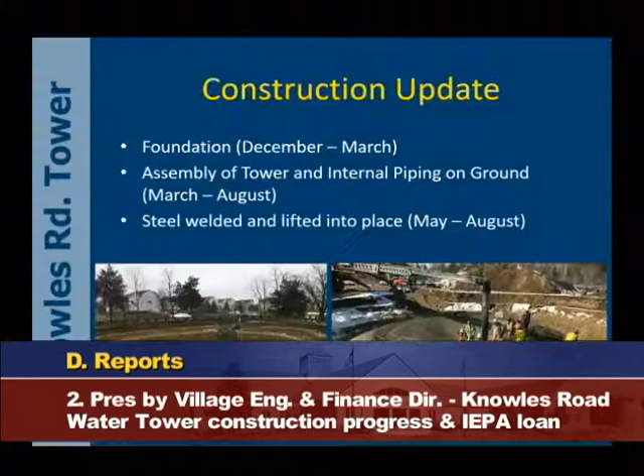Good evening, Mayor, trustees. Thank you for the opportunity to speak to you today about the Knowles Road Water Tower and our IEPA loan update. I'll go over the construction update and what's to come with respect to the project, and Brian will go over the financials at the end.

For construction, the two photographs here at the bottom show the construction of the foundation of the water tower, which you can no longer see since it's been buried. That was done in the winter months. It took about 50 concrete trucks and about 490 cubic yards of concrete, which gives you a scale of how large that was.

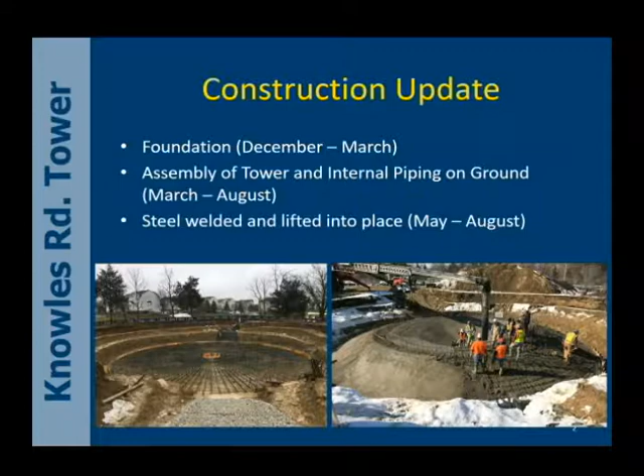Then in the March through August timeframe, they assembled the water tower and the internal piping at the ground level and underground that takes water from the main into the tower. The steel has been welded over the last several months, as I'm sure you've seen as it proceeds up.

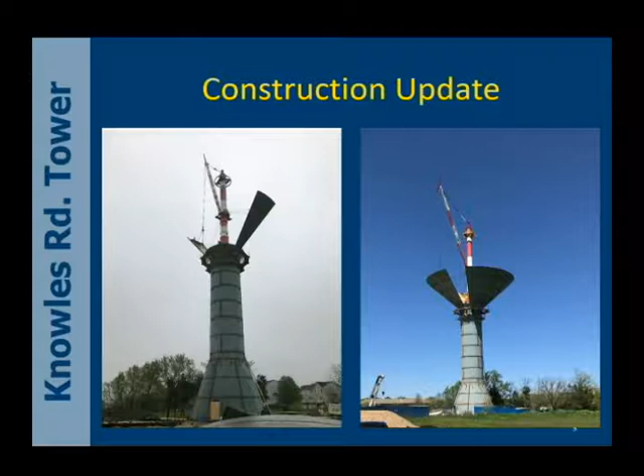Here's how it gets constructed. They use welding at the ground level, and then the panels get lifted up into place. So here's the beginning and mid of the bottom section, then they do the midsection, and finally the top. That's the progress we went through.

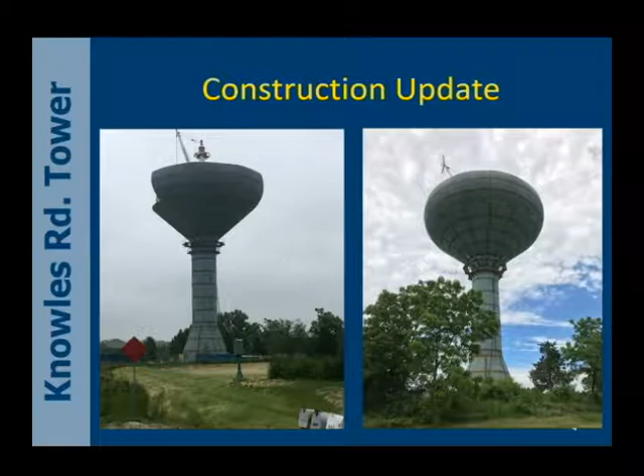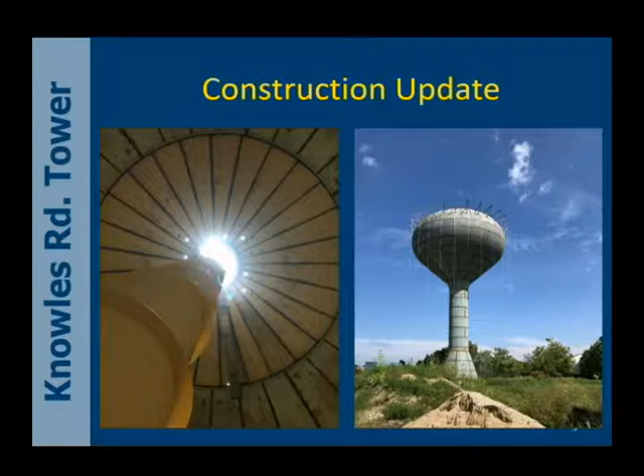It only goes up when they're working and comes back down at the end of the day. It's supposed to contain debris and stop it from sticking to the paint as they're applying it. There will be 3 coats on both the inside and outside to maintain structural integrity.

So what's going to happen next? Right now we're at about 82% complete, and the painting of the interior and exterior is going on right now. It's a 12-week process - we're probably in about week 1 or 2, so it'll take us to the end of November, at which point they'll install all the equipment inside the base of the tower.

That's for controls, SCADA, motor control centers, all those things. They'll fill the tower with water, chlorinate it, test it, and then set the parameters at which the water tower will fill and disperse back into the water system. At that point, we'll be at substantial completion, which is important for what Brian will talk about later.

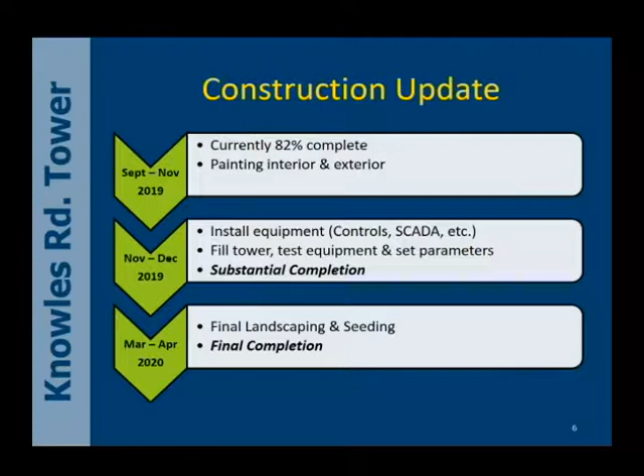Then they'll shut down for the winter and come back in the spring to do the landscaping. So they should be pretty much complete by the end of the year.

I wanted to take a second to review the loan and the direction staff had last time we talked about it and approved the loan. The total approved IEPA loan was $6,132,208. Against that, we have about $5.97 million in contracts, so there's a little bit of contingency built in. The loan term is 20 years at 1.84%, fixed.

We have about $1.76 million remaining to be paid out on the contracts that are tied against the loan. As Heather mentioned, the first payment is 6 months after the substantial completion date, which we're targeting for the end of December, so our first payment on the loan will be in fiscal year 2021.

Just a note on the next bullet point: the cash balance in the water fund at the end of last fiscal year was $6.35 million.

As we talked about when we approved the loan documents, we discussed using $1.5 million from reserves to lower the amount we borrowed, plus an additional $200,000 annually towards debt service, which brought us to the 10-year term we had talked about then. So really just making sure that's still the direction the board wants to go. It gives us a little more budget flexibility by paying some up front and frees up money in the water fund.

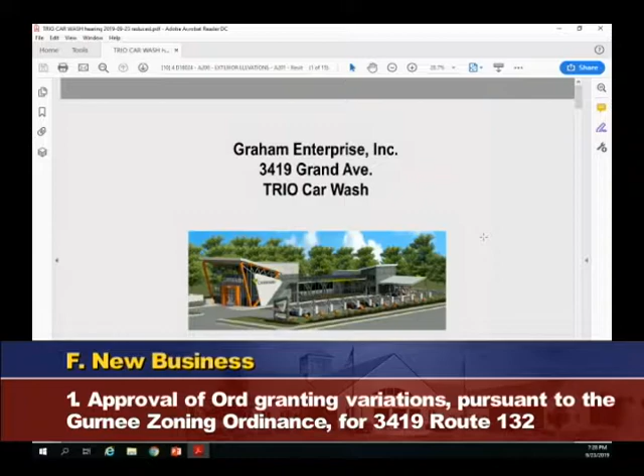As you know, they were before the Planning and Zoning Board earlier this year with a proposal to redevelop the site for a car wash. It received mixed reviews. Before it came to the village board, they redid the plans. The village board remanded it back to the Planning and Zoning Board, where it was heard again. Made it through that process. There's been a lot of changes along the way.

The memo from our associate planner, Clara, was very detailed, but as I said, it's a pretty complex proposal just because of the moving back and forth between the planning and zoning board and village board. David lived through it, was at all the PZB meetings, and is going to walk us through where we're at, kind of where it was, and where we've gotten to today, and what exactly the village board is considering this evening. Okay, thank you, Patrick.

I will do my best to give you a clear, straightforward synopsis of the process to date. It first appeared at the Planning and Zoning Board. They had several requests for variances, special use permits, and a couple of minor sign exceptions on the list. A few were approved or recommended for approval, a couple were recommended for denial, and one tied 2-2 vote that ended up being no recommendation.

Once they completed the planning and zoning process, they went back and retooled the plans a little bit and were able to resolve some of the issues that the Planning and Zoning Board had with some of their negative recommendations. Based upon the scope and quantity of those, staff felt it appropriate, and the village board concurred, that it should go back to the Planning and Zoning Board for them to take a second look at it.

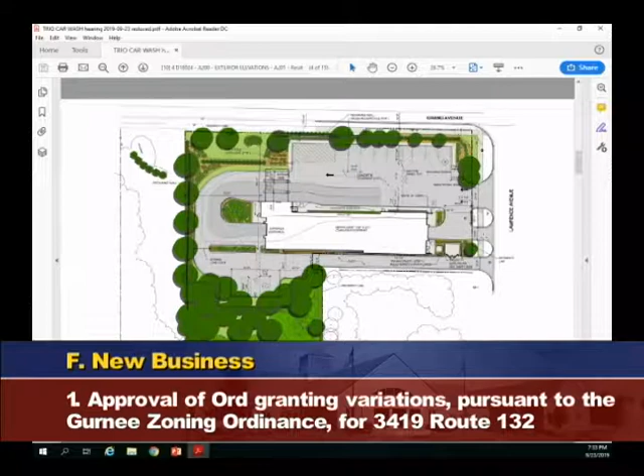Trustee O'Brien: Just for clarification on the design, back to the first one, would be fantastic if you can point to it. Just where is the grass versus asphalt section? This is the drawing to show the 3 pay stations were in this area. Those have been removed, and they've opted to keep the paved area and just hatch it off versus removing that and turning it to turf.

So it's creating green space on the front, and more permeable surfaces so water can get down instead of flooding. This is one of the comparisons made between the Hunt Club corridor and this corridor. We've always insisted on a lot of green space in the front to lessen the intensity, and so we've been trying to do that in this corridor too.

I understand. And one other, Mayor? Go ahead. The 2-2 tie had to do with the interior signs, and they mentioned, if I recall reading correctly, that there would be some trees that might block the view off of Grand Avenue. Or is that the 2 trees in the upper left-hand corner there?

Right, the signs in question are basically in this area, so it is going to be a somewhat obscured view into those signs. Planning and zoning board had mixed feelings on whether they were necessary, and they did exceed the requisite square footage and height of the signs within the site. So that's why it came to you as a 2-2 tie vote.

And I think those 3 signs were also to market some of the plans that they had, so it's primarily for the cars coming through the car wash that they could see advertisements. It's designed to market to cars already on the site, not marketing to cars off-site on Grand Avenue.

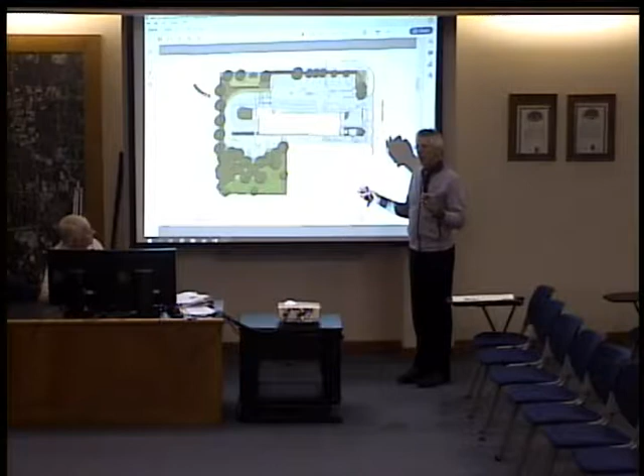Graham's have 19 car washes that they operate very well. I've designed over 350 car washes, so we're very aware of the maneuvering that's required. For this type of business, there are 2 things to make it successful: the person needs to be safe, and it needs to be convenient. It also needs to appear safe and very easy to turn, not tight turns. So all these radiuses have been run through a computer model to make sure that even the largest car, one as wide as a Humvee and as long as a Suburban, much larger than any car on the road right now, fits. That's how we determine the radiuses.

To enter the car wash, you're only entering from Lawrence Avenue, correct, this is the entry point, and it's one-way with arrows. Cars on Grand Avenue can enter Lawrence Avenue by making a right turn southbound or a left turn southbound. The current car wash right now actually has 3 curb cuts along Grand. So this whole process is really making this a more automated operation and a safer one.

When the wash is complete and you're exiting onto Lawrence Avenue, can you exit left or right, north or south? Yes, but quite frankly the majority of our customers are going to go back to Grand. Is it a mandatory left turn out of there? Not mandatory, because we like the neighbors to wash their car and be able to go home. Lawrence isn't a through street, though. No, it's not a through street, but there is a back doorway down to Washington if you know the local streets. Oh, that's where you make that elbow, go by Oakwood.

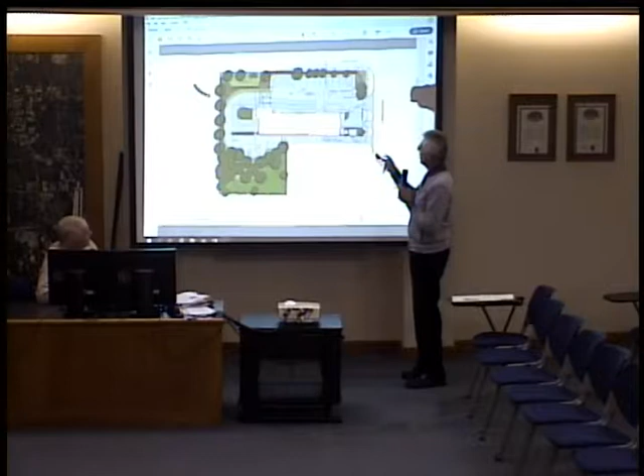It's a big part of the business, and the free aspect of it is very huge. We previously had 12 vacuum areas here. And Dave, I was wondering if you could advance to the very end of the slide, even, one back. Okay, these are 4 examples of car washes that are successful today.

3 of them not designed by me, 1 designed by our firm. We want you to notice that in this one here, and this one, if you draw a line from this pay station, there's only 9 feet from the back of the parking to the stacking lane, this third stacking lane. If you could go to the next, Dave.

This one here, the entrance is here, and you can see from the back of the parking to the lane, there's 0 feet itself. If you could go to the next one. Again, when you have the entrance point here, here's the pay point, the drive-through, there's 0 feet between the back of the parking and this drive lane.

And then finally, the last one, this one is diagonal, and you can see the number of cars here, a very busy site. But again, we have 0 here and 0 here. What happens 90% of the time is that this works very fluently, and there's no need for the on-site help to do anything. You can see there are no cars stacked up here. This automated process brings the cars so quickly through that you don't have the stacking problems of the old type of car washes.

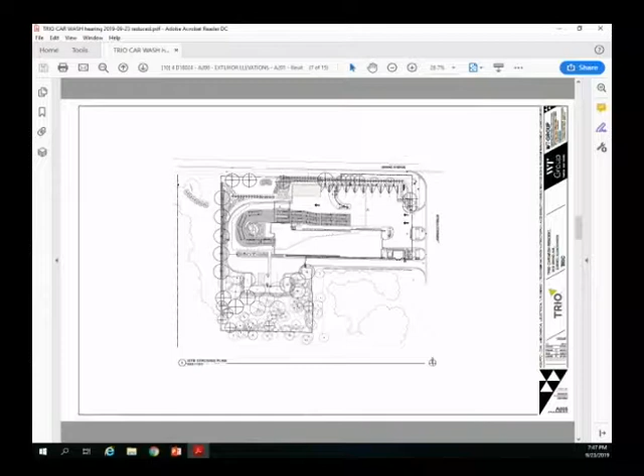And so, David, if we could go back, again, those were 4 sites, 3 designed by totally different designers and 3 different owners. And one more, please. Oops, and one more.

There we are. So we actually originally designed this where it was tighter, and the reason being, in an express style car wash, on those super busy days, basically 5 to 6 days a year, a salty Saturday after the Friday snowstorm, people want to get their cars, the lines will start occurring, and we know we will close these vacuums and just direct traffic.

But in this case, we have redone this design. We don't have to do that. We have 24 feet 6 inches here, and that's enough for 2-way traffic. We've already expressed this as 1-way. Technically, by your code, this only needs to be 12 feet. So basically, from the back of these stripes to the narrowest part, where there's not even any vacuums any longer, it's 18.6 feet, and 24 feet to here.

What our thought has always been for these 3 spots, even when they were 3 vacuums, was this is where the snow is going to be. We were actually going to put ice melting in the pad here, as well as ice melting across here. And there's no way, don't worry, we're not going to spend $2 million-plus and have a big, ugly snow pile here.

This would be a quick way to plow just this area of snow to make this operational, put that there temporarily while the car wash is running, and then on off hours either relocate it, or we would be melting it into the storm system. So it's a very important part of our operations.

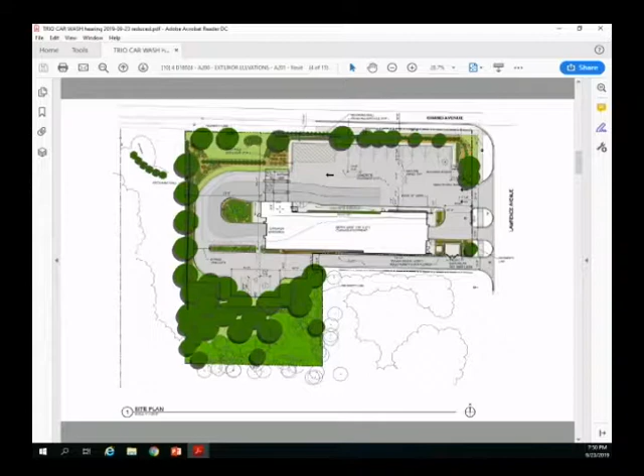So we are making a very strong ask that we're allowed to keep this area for our snow and snow melting. One thing I want to express is that if you look at this whole site, we have 18,641 square feet of landscaping. That is a 40% landscape ratio. Typical commercial sites are 20% or less, so we're having almost double the amount of landscaping on this site, and we're augmenting it all the way along the front.

We have continuous landscaping, so quite frankly, from the street view, you will not know if that is pavement or landscaping. We've been handcuffed a little bit in the way we had to modify our design. We ask respectfully to allow that pavement to remain, from an operations standpoint, in terms of the snow melt.

Again, we have 220 new plant units. I just wanted to give our defense on that.

Could I just ask, I need to hear staff's response to that. Okay, I mean, obviously there's a difference of opinion, so David, what's your take?

On the snow piling, our initial thought was it's excess pavement, and we don't like any excess pavement where we don't have to. We suggested leaving it as a green turf area where you could still pile snow, with no bushes, no trees. They indicated that their desire was to be able to scoop it up and haul it off site or relocate it on site if need be.

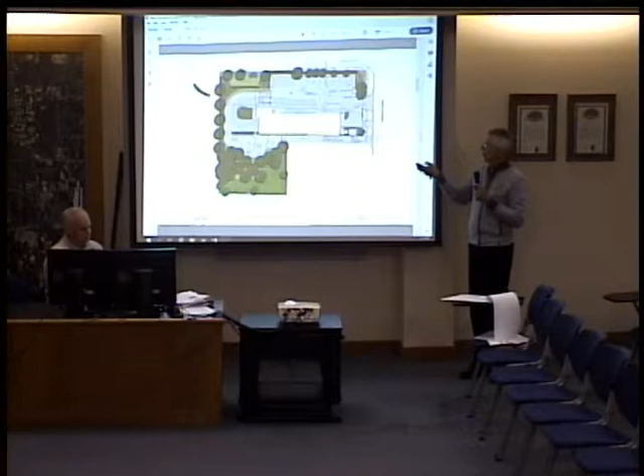We respectfully request to be allowed to have these signs. In this case, when a person is beyond this entry point, they're in the store — they're in the front door of Walmart. And when you get into the front door of Walmart, you see signs for the different departments. That's what we try to do, very specifically, in terms of how we direct the person around — what type of signage tells them about the menus, and then after they've made their selection, what types of offerings and memberships they can get. So with the operations aspect and the signage here, we respectfully ask that you consider our request.

Trustee Bomas: If we were to allow that striping where you want to put the snow, how do we know that it's going to stay empty except for snow? That you're not going to start selling wood chips or park a car there for sale, or another use other than empty space?

That's a very good point. That will have to be established by the ordinance that's written — verbiage can be put in of that nature. Basically, it's going to be used how we're presenting it. We will stripe it like that, showing no parking and such, and we ask that you help us enforce it. We'll put signage there as you need us to.

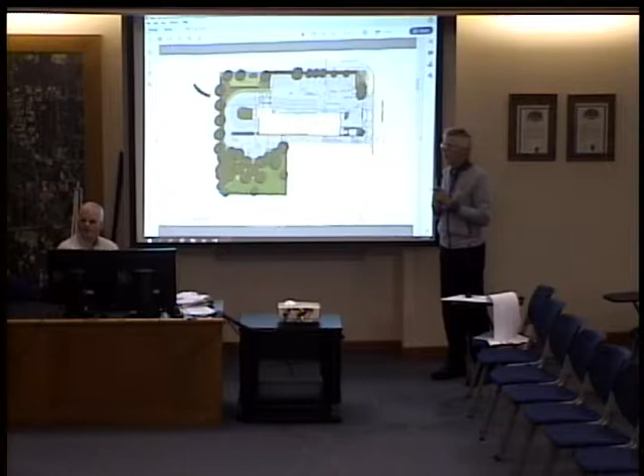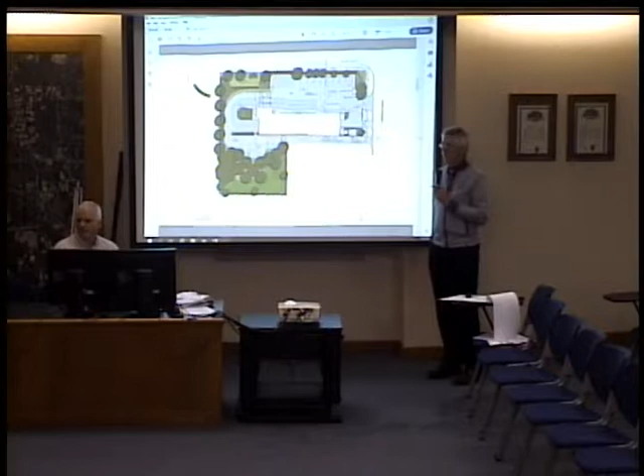Any on-site sales like that would need a retail counter or something like that. The way the site is set up really doesn't have that and isn't available for that. So anything along those lines would entail a reconfiguration of the building, so it'd have to come back through permits, and we'd figure that out at that time. I'm not too concerned about that.

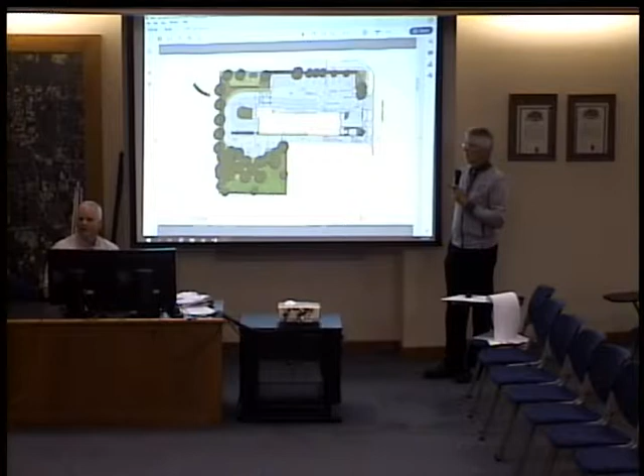And I will have to concede that we've asked a lot on this site. They have given a lot on this site for a lot of our requests, and at the end we're pretty much in compliance with all of the PZB recommendations, with the exception of 600 square feet on a 2.5-acre site. So, in the grand scheme of things, that's a fairly small percentage. Thank you.

Trustee Ross: So when you come into the site, there's signs telling how much it costs and where to go, because I was looking through and I couldn't find the signs. The main sign, of course, is the ID sign itself that will direct the general nature of the facility — that's your monument sign, right at that corner. And then as you come in, obviously the arrows, there's directional signs here that say in and out.

Then as you approach here, they have the menu boards right here that list basically the 3 to 4 types of washes that are available and what each package contains.

So the pricing is there. The person right here deals directly with the person at the window. This one is an automated pay station, and our members clubs will have a little tag on their car that's read automatically, so they just go right through. As they come around, they'll see the ID signs to become members.